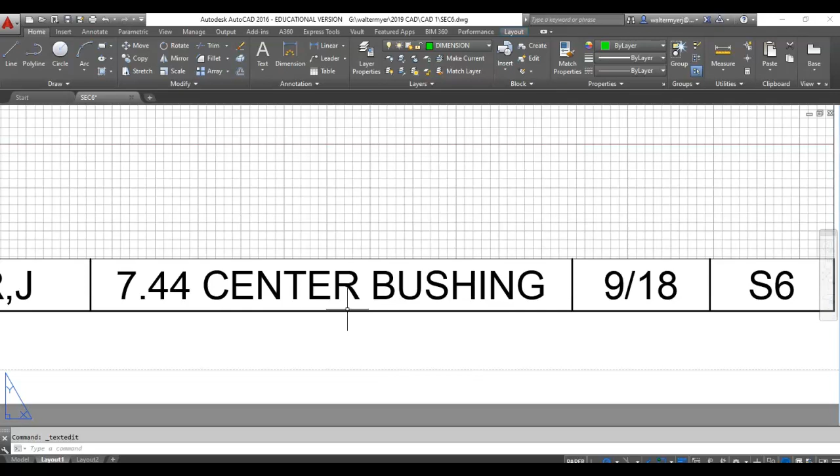I'm going to switch over here to my model view. I'll start with my front. The front's going to be the circles, labeled in diameter. I'll start from the outside and work my way in. The biggest one is 4.75.

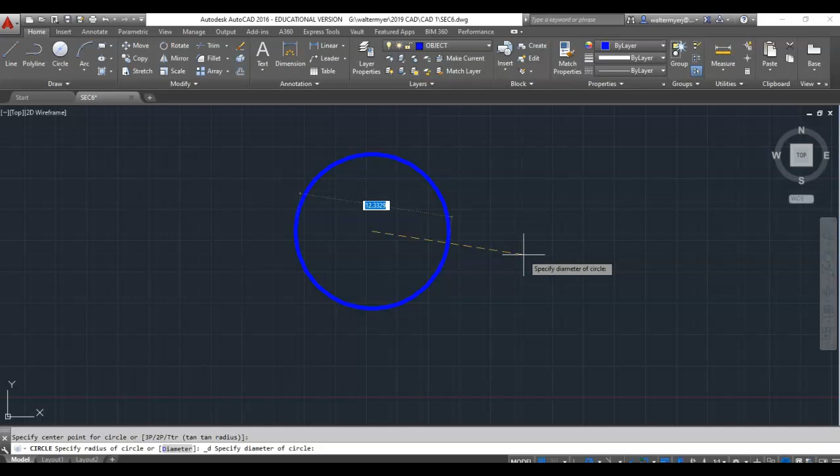Next one would be a center circle, 3.38. And then the next one in would be 2 inch.

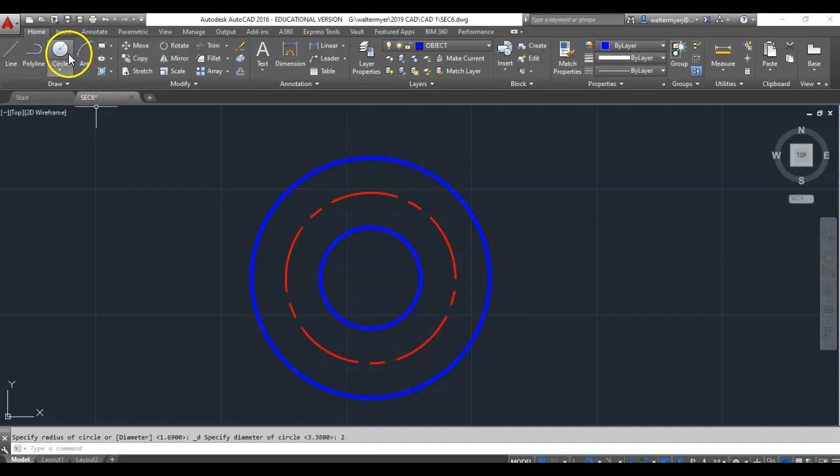And then inside of that would be 1.372. That one has the tolerance listed again - it can be plus or minus a certain number. I'll just give them the flat number that it gave me.

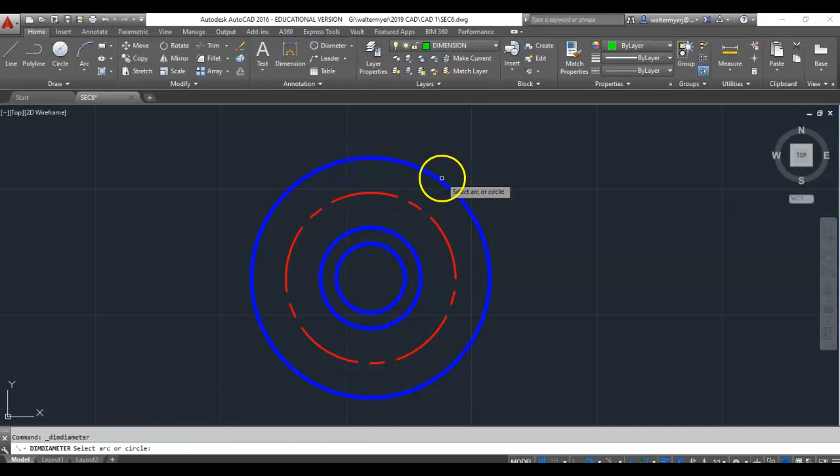So let me label these: 4.75, 3.38, 2, 1.372.

Alright, now I'm going to do the center lines. I'll throw in a horizontal and a vertical.

Then where the center lines I just did hit on the left, right, and bottom, I'm going to have counterbore holes. So from the front, they're going to have 2 different diameters, a smaller and a bigger.

The bigger diameter is 0.75. The smaller diameter is 0.375. Once I have them here, I can use copy and place them there and there.

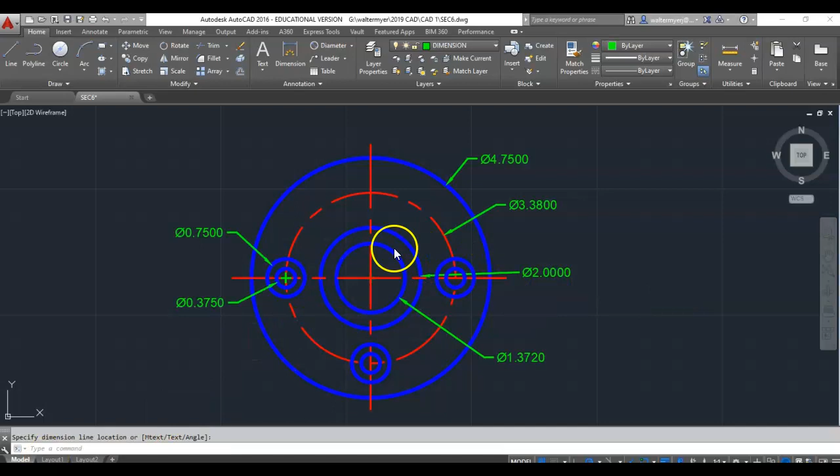Alright, once I have these 3 counterbore holes, the top part here is different. There isn't a counterbore hole - there's kind of a cutout, almost like a silhouette.

I'll go back to my object layer. Alright, at this spot where the center lines meet up, it's labeled a radius.

So let me switch to center radius. Not all the way up there on the center line - there we go. Radius is 0.24.

Alright, now there's a whole section cut out here. On the paper it tells me the entire width from one side to the other is 1.12. It also tells me from the center to one side that's 0.56.

So I'm going to use offset. I'll tell it 0.56, and offset the center line to one side and to the other.

So I'll label those at 0.24 and 0.56.

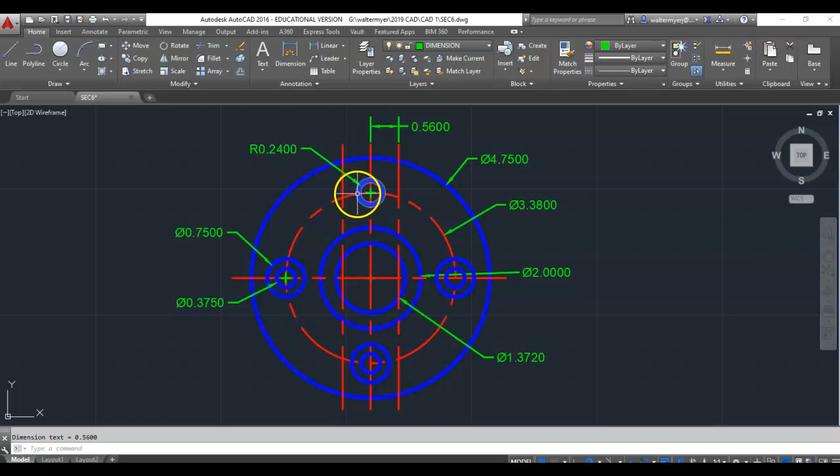Alright, so the cutout isn't that entire width all the way up - it's going to get skinny to the diameter of the circle. Where it changes, the paper tells me from the horizontal it changes at 1.24 up.

So I'm going to use offset, 1.24. I'm going to offset the horizontal line up.

Alright, I labeled it. Now you could change the lines and trim, but I'm going to draw over top of them so it's a little easier to see how I'm doing it. So I went to my object layer and I'm going to start with the line.

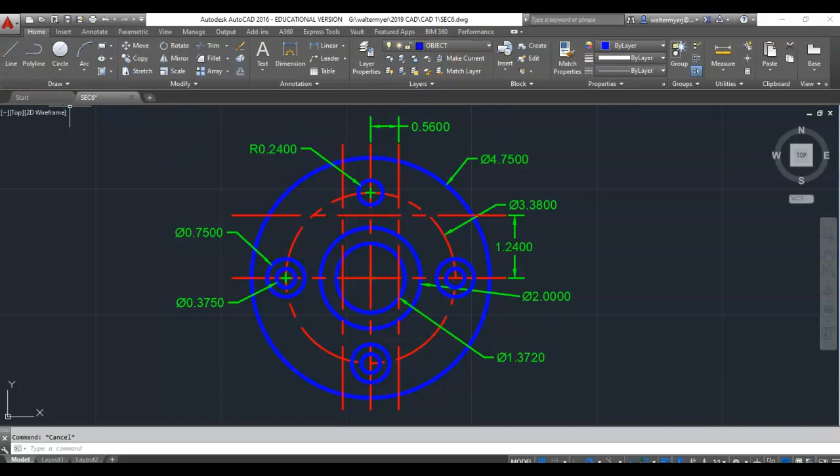Let me zoom in. Alright, where the center lines I offset, the vertical ones hit the inside circle, I'm going to come up until I hit the one I offset horizontally. I'm going to bring the widest part of that small circle down and connect up.

I'm going to do the same thing on this side: center line, wide part of circle, connect back up.

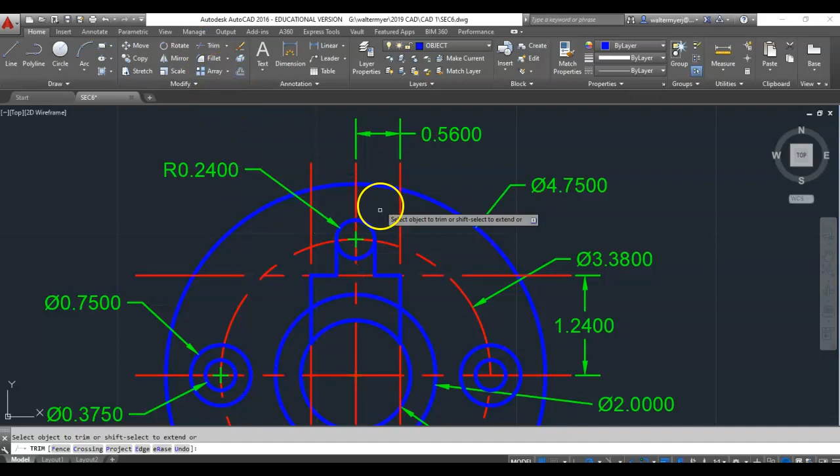Once I do that, I'm going to trim this circle - make sure, yep, got it. I'm going to trim the top of those two circles.

And then, because I drew over top of the lines, the center lines I offset, I can just delete them.

The last part I'll have to do is these corners - if you think of it like a silhouette, like a person, their shoulders are going to be rounded. It tells me the radius is 0.12.

So I do fillet, radius 0.12. Click on the two lines. Click on the two lines.

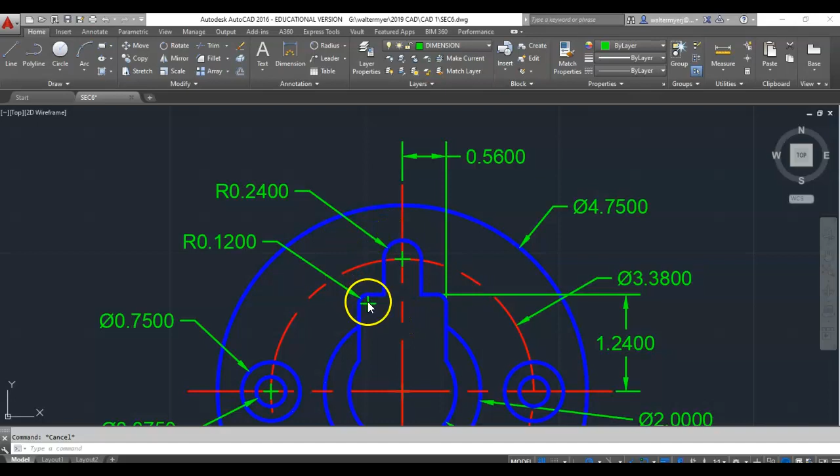Alright, now with rounding the corners, I threw in the dimensions for the radius here. I just extended those dimensions down. My front view is pretty much done.

Only thing I've got to do is make my section line. So I'll just change the vertical - we're just going to do a full section, slice it all the way down, top to bottom.

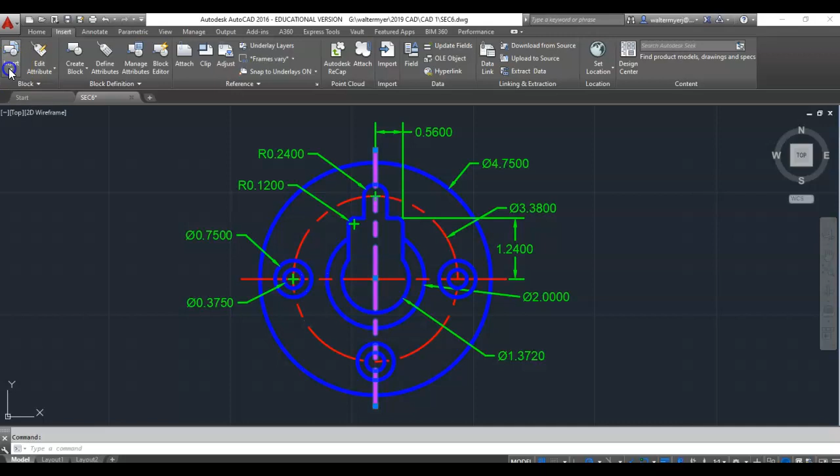Now I'll go insert, more options, add my arrow, adjust the size, and it'll be pointing to the left. Once I have one, I'll just take it and copy it up to the top.

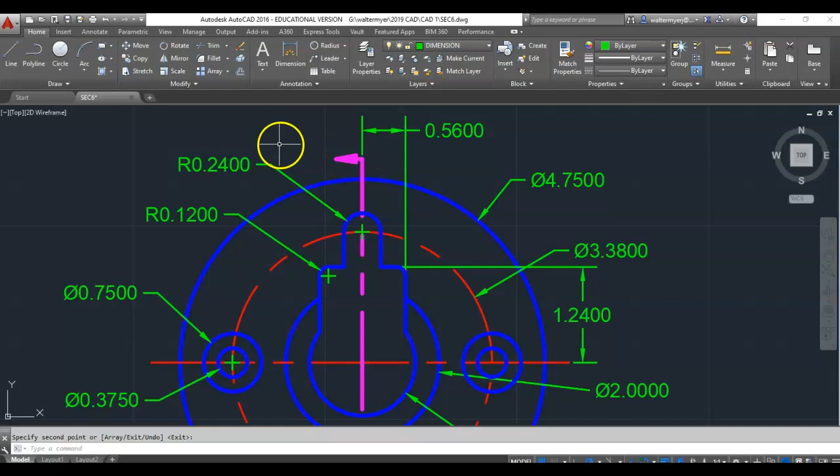Alright, now the right side. I'm going to bring overall height over.

Alright, the thickness for this back plate is 0.62.

Now, when I bring over for the cylinder in the middle, it's going to be slightly different than what you would think. The outside one is diameter of 2, but the top of it's cut off.

So over here, the width on the section view is going to be less than 2 because part of it's cut. So what I'm going to do is come from the bottom over.

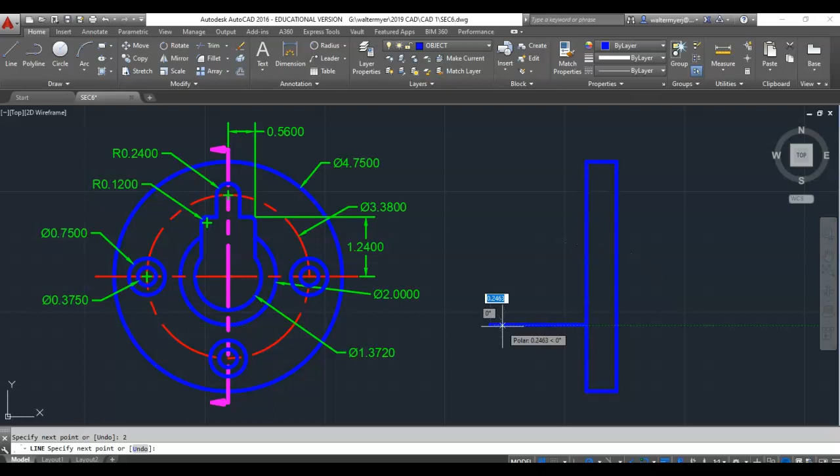Alright, this is going to stick out 2 inches. And then for the top edge, I'm going to go with the top edge of where it's cut.

So this is all empty space - kind of the topmost corner. Bring that over. That will also stick out too.

Alright, so I'll label those thicknesses - here's 0.62, and the entire thing, front to back, is 2.62.

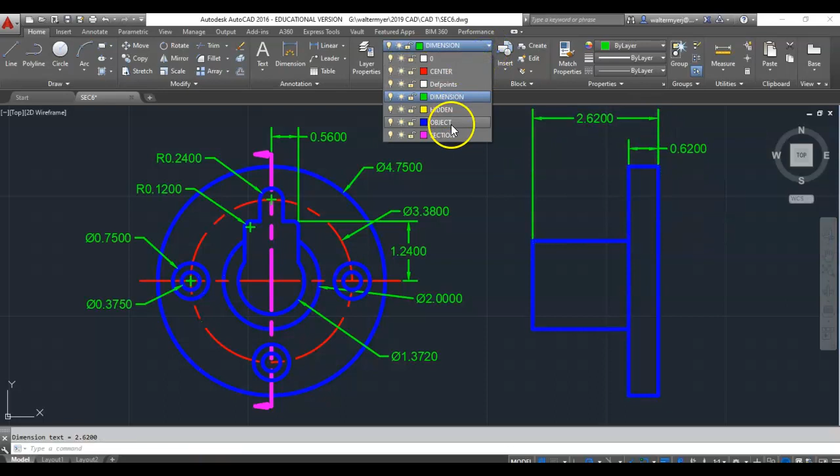I'll go back to transferring lines over. So the top is from this corner here. Then I'm going to bring the inside circle.

So I'll bring the bottom one over. That's going to go all the way through.

So I did the top corner, now I'll do the top corner of the smaller one. And line it up, bring it over. That will go all the way back.

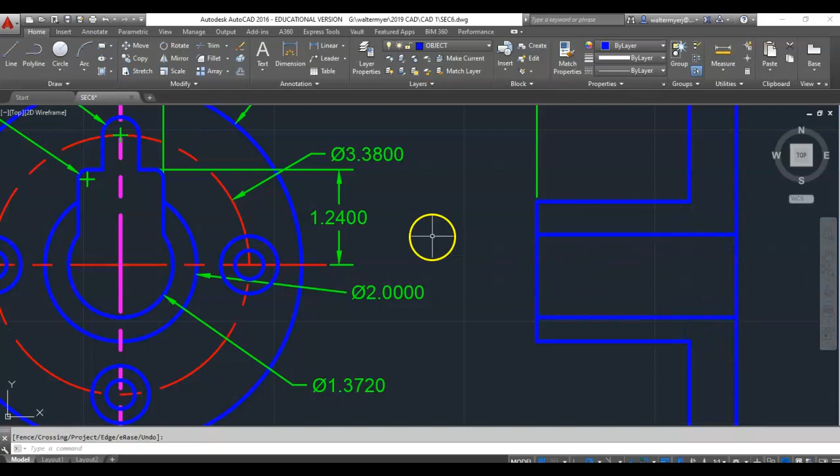Now this line, I'm going to trim right across there. Zoom out a little bit for you.

So if you want to double check if you brought them over from the right spots, if I do a linear measurement of this front face, it's 1.8285. So it will be less than 2, because again, the top part is cut.

Since I'm working on this cutout section, I'll bring over the other lines for the silhouette here. This would all be one flat area. Next edge I would see would be this corner where it goes from being wider to skinny. Then I'm into the skinny part. Next line I would see would be for the very top of this circle.

I'm putting all those as object because we're going to cut this right side away, hence the section view, the section line. So I'll be able to see all those lines.

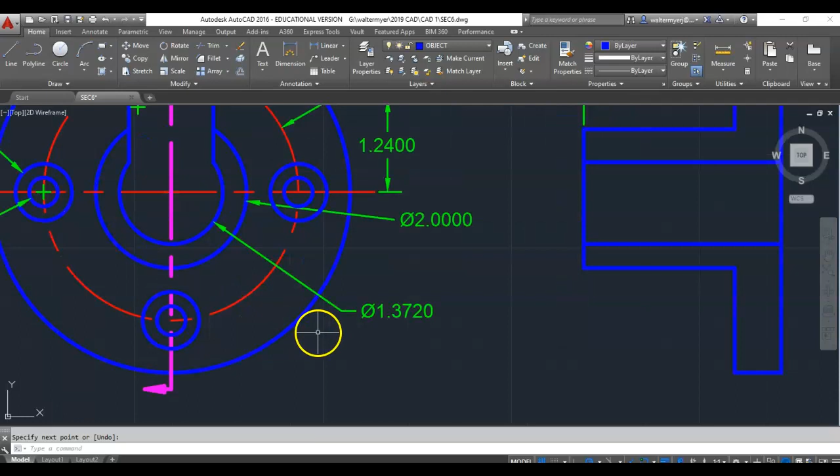So I have the top part done. Last part for the section view is the counterbore hole on the bottom. From the bottom I would just see the one. I'm going to bring the big circle over. The depth of the bigger circle is 0.3. I'll bring the bottom, and then the smaller circle would go the rest of the way through. I'll label the depth so you can see it. It is 0.3.

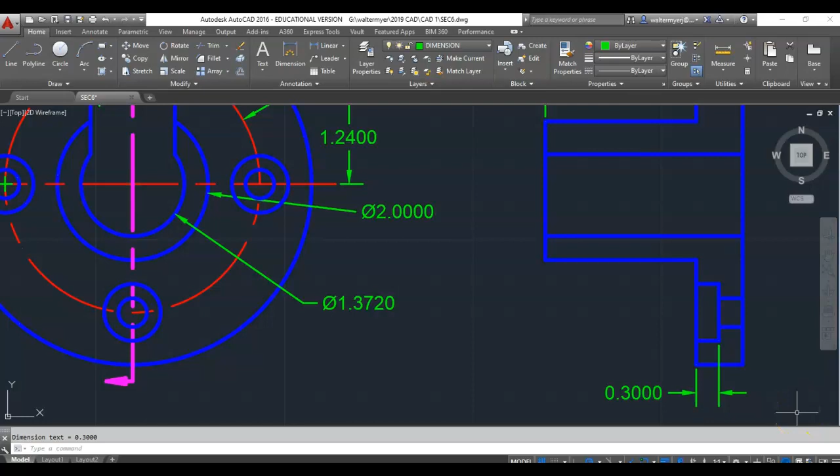Once I do the counterbore, I can add in my hatching. The hatching is a little bit different on this one, just because there's more open space. Again, it doesn't tell us material, so I'm just going to use ANSI 31 and work from the bottom. The first section is going to be solid and cut through. Next to here is where this hole is, so it's empty space.

Next part is solid, so that's this section from here to here. This is empty space because it's a big hole in the middle. This is empty space because it's cut. This is empty space because it's this part right here. So the last part you need hatching would be the very top. That's the only other solid part that's being cut through.

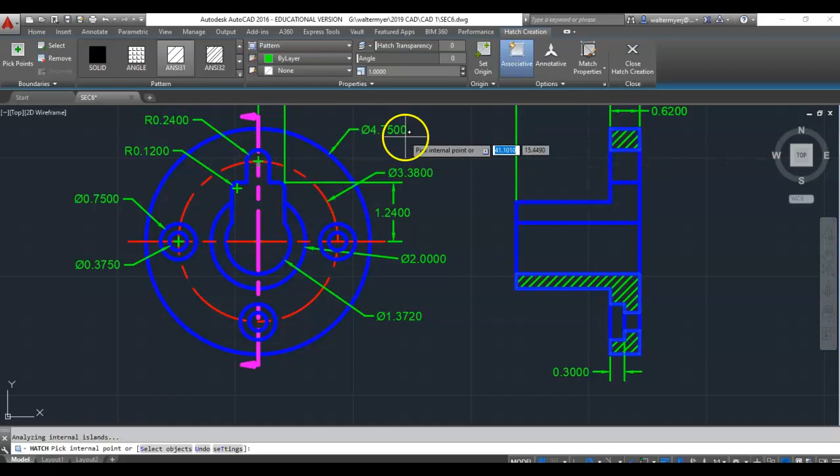So your section view is not symmetrical, so the top doesn't look like the bottom. Alright, same thing, I paused. You can... okay.

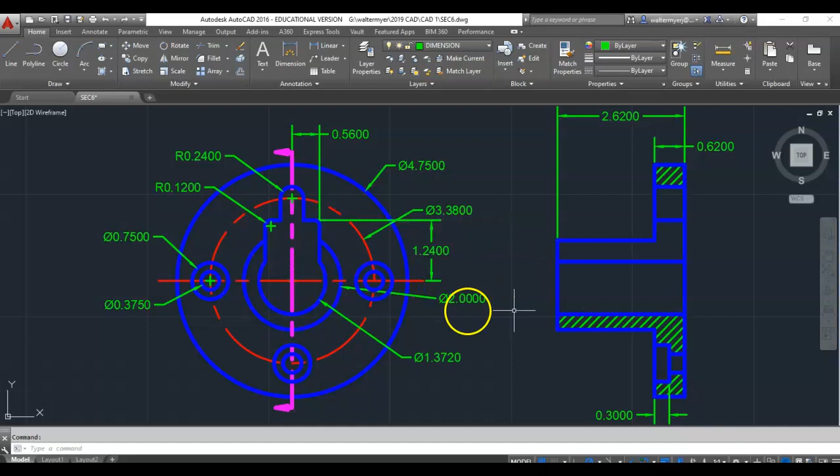Alright, so I have my front view done. I have my right side section view done. Last part's going to be my top view. I'm going to start it the same way I did my right. I'm going to bring up my width from my front. This part is 0.62 thick.

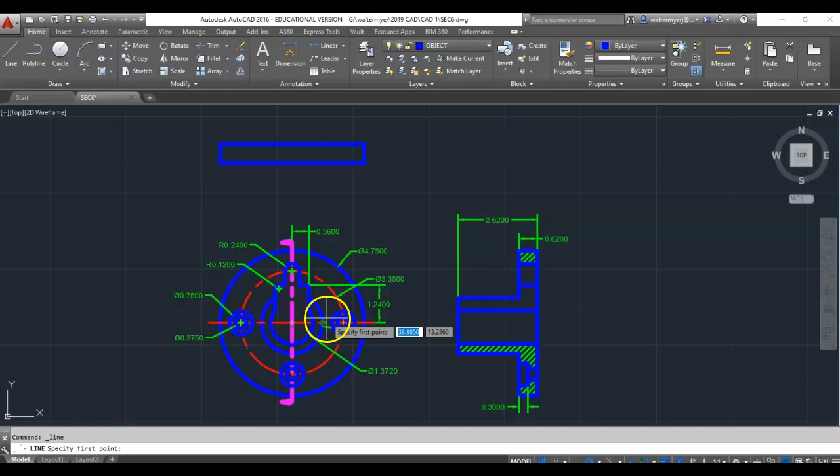This time the cylinder that sticks out, the width is going to be the true 2 inches. Let me zoom in a little bit. So the distance it's going to stick out is going to be 2. Distance over, I can transfer it up, but it should be 2 inches. Connect up.

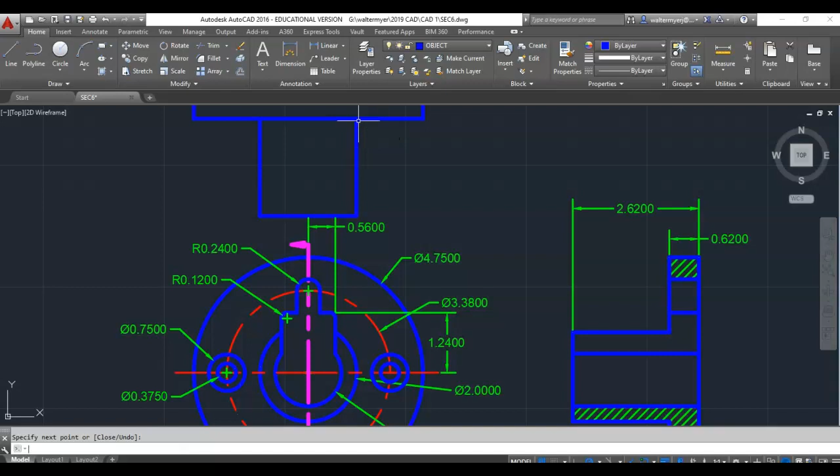Alright, I'm going to do the counterbore holes because there's going to be 3 of them. Let me move this down a little bit. So once I do one, I can just copy it.

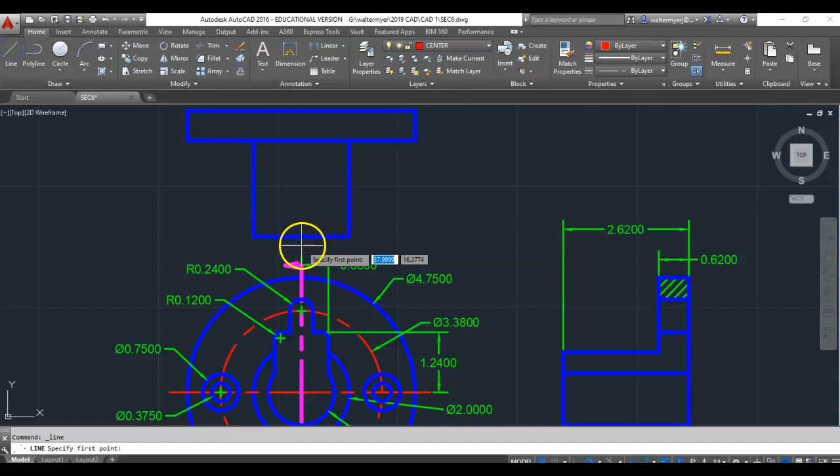There's going to be more lines for this cylinder and this cutout though. So I'm going to start by adding a center line through the middle, then a center line through each of these counterbore holes. And just changing the scale so I can get the dashed line.

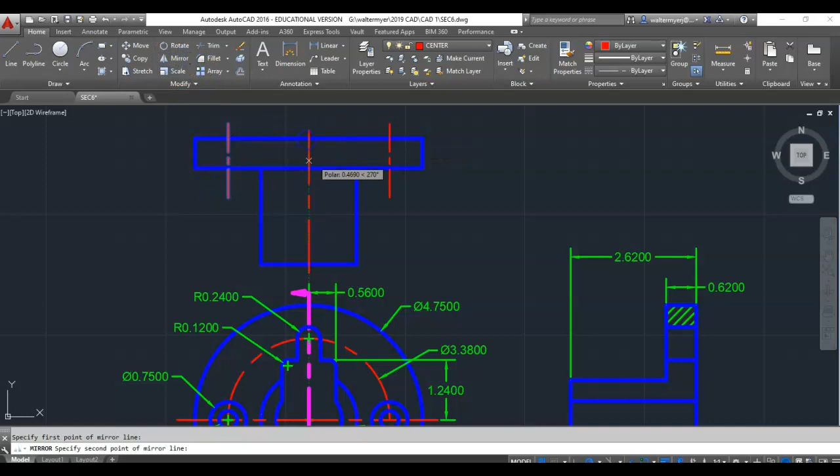Mirror, flip it over. Alright, I could do the counterbore hole from scratch, but I'm smart/lazy, so I'm going to select the counterbore hole from my section view, and copy it up into empty space. I'm then going to rotate it 90 degrees, change it to hidden, and then use copy because I'm going to need 3 of them.

And if I line it up and grab the midpoint between these 2 lines, so I went here over, midpoint down, there we go. There's 1, there's 2, there's 3. And then my counterbore holes are all done.

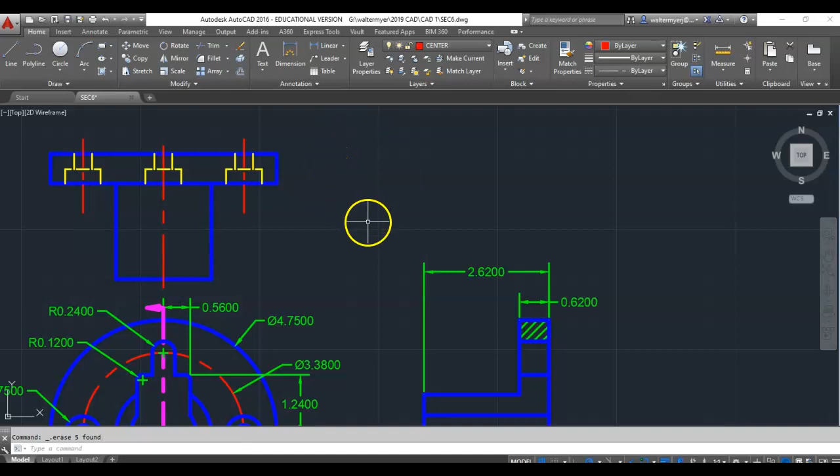Now I'm going to do the part that can seem a little tricky, so this cutout. I'm going to do the cylinder part first. The next lines, so this is the widest part. Then looking down from the top, I'm going to see this corner where the top section's cut away. I'm going to bring that up.

From the very front to here is going to be object. The rest of the way through, because that's still cut through the back plate or back part, would be hidden. So there's that being cut all the way through. For the wide part, the inside circle will be beyond that line, so it's covered up by this little curve. So that's going to be a hidden line the whole way front to back.

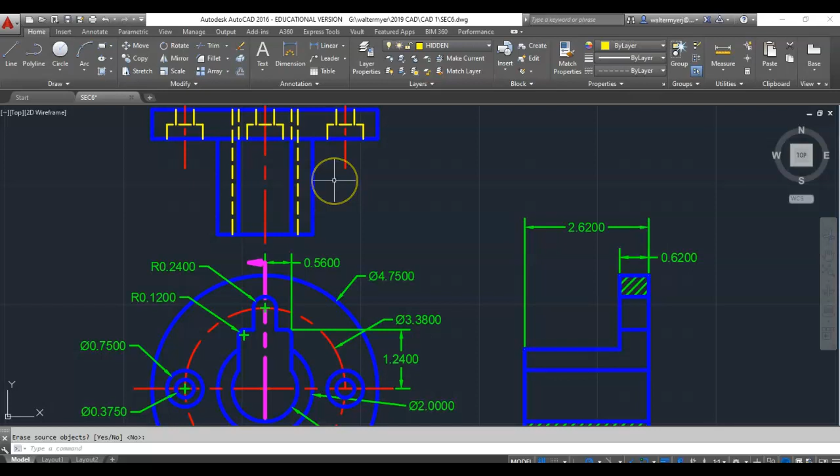I'll take those and use mirror and flip them to the other side. So I am about 95% done. I know it's looking confusing already. Last thing I have to do is this part here, the radius 0.24.

That is going to be a hidden line, and it is going to go just through that back section. Again, you'll have one for both sides, so I mirrored it to the other side.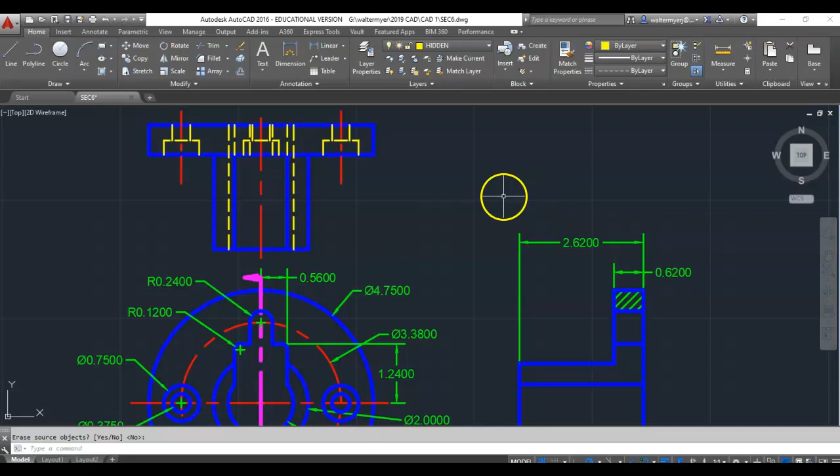Alright, I know there's a lot of lines. I'll have all the dimensions labeled on here. All the thicknesses are here. All of these diameters are labeled here, so I don't really need any dimensions in the top.

So I'll zoom in so you can see. And this one's pretty much done. All we'd have to do is go to my layout, center it up, and then print her out.